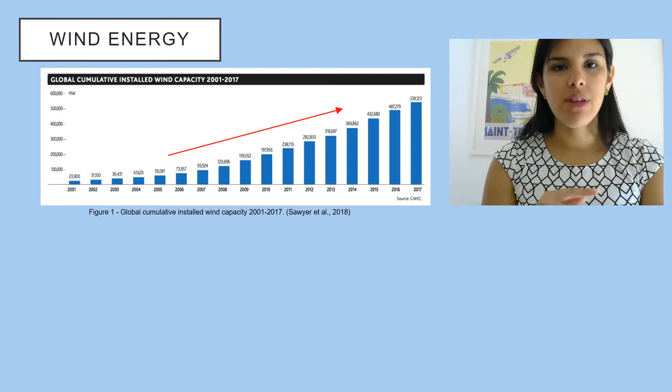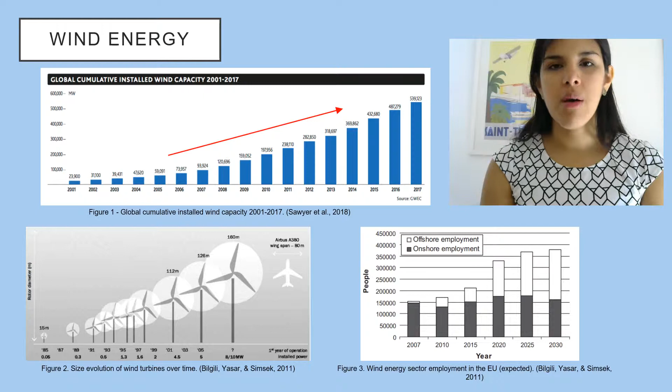I will show you my research proposal, a new alternative for offshore wind turbine foundation, a waffle-raft foundation. We are all probably familiar with wind energy, but the fact is that the installation of wind turbines has been increasing exponentially. That requires larger capacity and larger turbines to fulfill the requirements. Also, offshore wind energy is becoming more popular because offshore winds are steadier and faster.

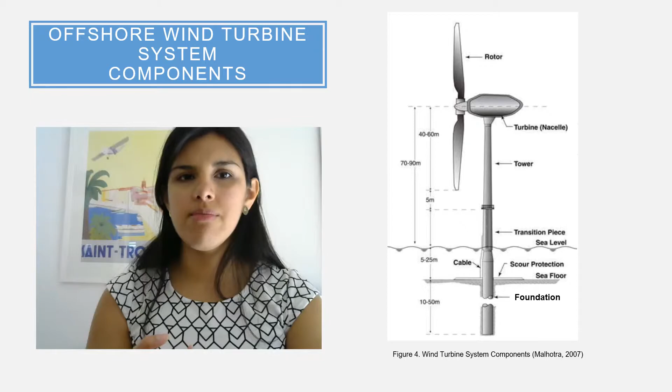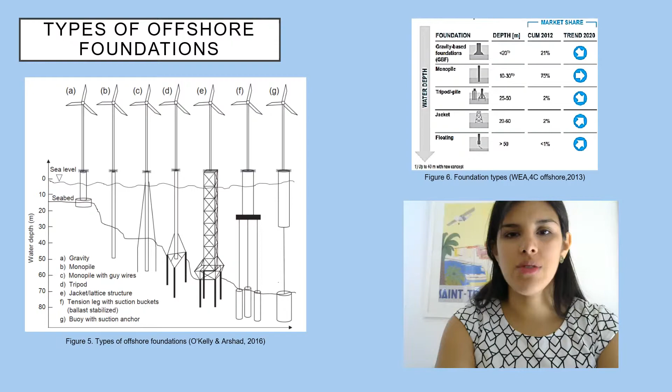The components of a wind turbine are the rotor, the turbine, the tower, and the foundation. There are different types of foundation, and that depends on the water depth on site. But the two most popular ones are monopiles and the gravity-based foundations. Any type of foundation is subjected to lateral and axial loads and bending moments. The gravity-based foundations rely on their own weight to provide structural stability against these loads. And as we can see in Figure 8, it requires larger dimensions to fulfill these requirements.

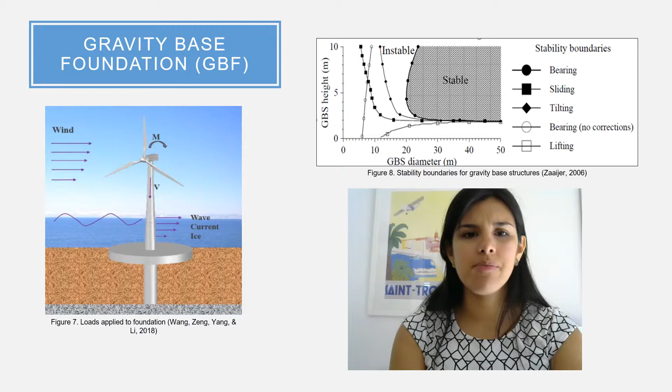The objective of wind energy is to produce less greenhouse gas emissions compared to fossil fuels, but the truth is that building the system itself produces emissions. That's why we have to assess the sustainability of the wind turbines. There are three components: environmental, economic, and social, and we are going to focus on the first two.

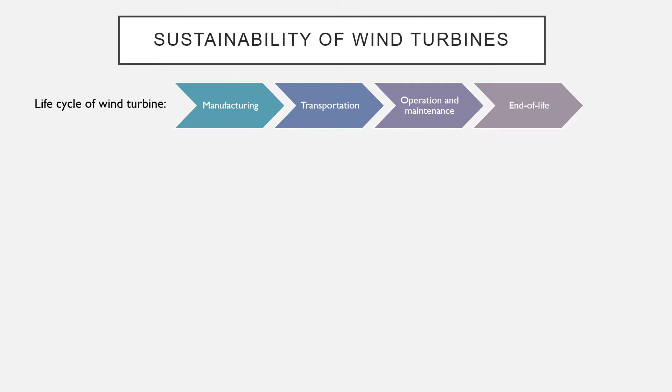The life cycle of a wind turbine has 4 phases. However, most of the emissions are produced during the manufacturing. As can be seen in Figure 9, almost 50% are due to the foundation. However, as the turbine operates, the ratio between emissions and kilowatt of energy produced reduces. The foundation can also represent between 20 and 40% of the total cost of the system.

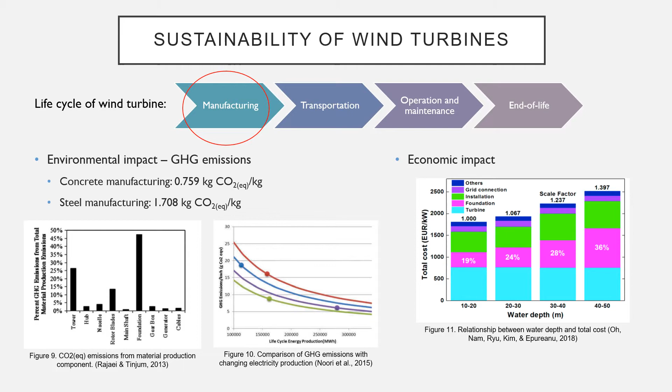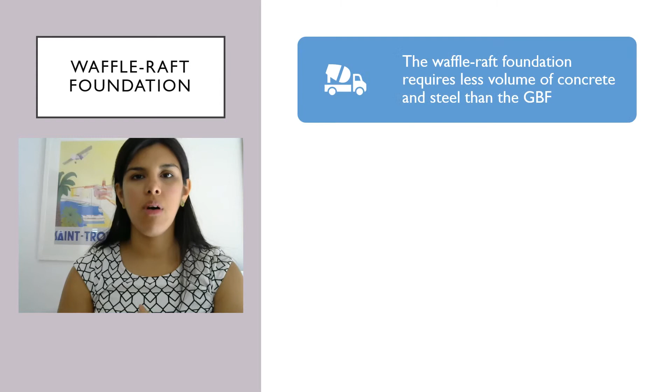Our proposal consists of interconnected concrete beams, or a waffle-raft foundation. This foundation requires less volume of steel and concrete, therefore reducing the emissions produced in manufacturing, but it also has to fulfill the structural requirements of the design.